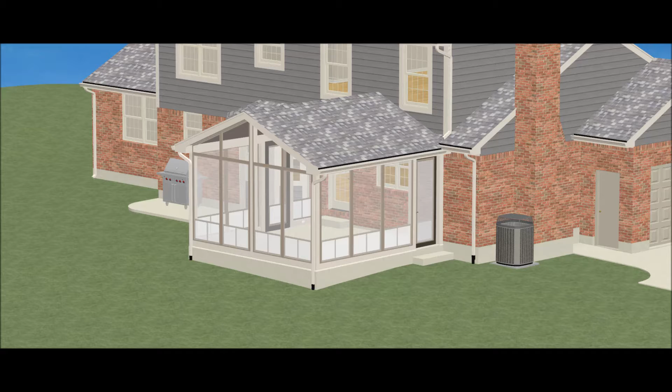Okay, this should be the last film to review this project. I know that these walls have changed, but this was what I was putting together earlier with regard to the foundation. The foundation needs to come out in front of this structure in order to provide clearance for the column bases at the bottom of these columns.

The three columns at the end supporting the three beams, those require CBSQ44, and that requires 3 inches of clearance from the edge of the base. And since the bases are 4 inches after the straps in one dimension, that really means that you need a 10-inch wall centered under that 4-inch base, or at least 10 inches of concrete, and that's got to go down at least 3 inches below the base, so 11 inches down.

Now the 4 columns back south against the brick, flanking the doors, etc., those will use a lighter base, a PBS 44Z, and that only requires 2 inches from the edge. But it doesn't really matter because I assume we want this symmetrical out there at the corner where it has the same projection in both directions.

As I said, I made this model earlier, and as shown, it only projects about an inch or so from the face of this because there was 2 inches under it. But in the final permutation, you'll see here in a minute, the surface of this foundation comes out 2 full inches in front of the surface of this structure to provide that 3-inch clearance for the column base.

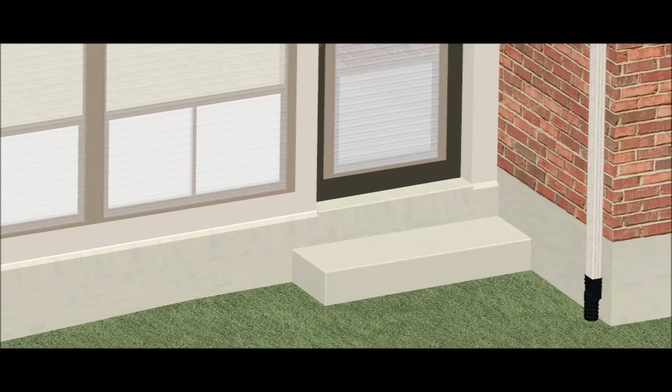So at all the margins you have this bevel, except at the doors there it has to come out. So this all has to be formed as it's poured or right after it's poured. This stuff has to be taken care of. I suppose these corners are clipped off on that sill. But this one here now you can see is the 2-inch projection. You can also see that line of aluminum flashing underneath the cedar and over the concrete.

The same sort of thing happens on this side as well. I didn't want to just run that same bevel in front of the doors. It would tend to be a slipping or tripping hazard. It just wouldn't be correct. And I think this is probably the best we're going to do with the interface at the bay window roof and this roof. As I said, I don't care for it, but I don't know a better solution that's not expensive.

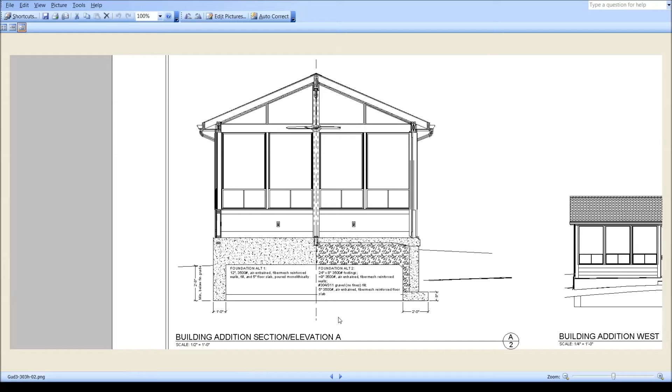And so currently, because of the site and the undecided nature of how exactly this foundation is going to be put together, I'm showing 2 different alternatives in the drawing plans. Foundation 1 is a monolithic pour where we just fill everything in there and come down with 1 foot wide walls. This would have to be formed above the grade. I don't know how that's done. I'm not a concrete person, but that would need to be formed above the grade, and then all this bevel work and edging work done, all while it's poured at once.

The other alternative, foundation alternative 2, is a 3-pour arrangement where I assume it's going to take a 2-foot footing for your person to form this up there. So the footings, and then 8-inch walls, but the front wall is going to have to be a 10-inch wall. At least that north wall has to be a 10-inch wall. These flanking ones can be 8-inch walls.

And then finally the 3rd pour is the cap over, and you have to have some sort of separation here, I assume. So this pushes this out. So this projects about 2 inches from the face of the structure, and this one projects about 3 inches because it has to have some sort of separation here. So that said, I wanted to see how much concrete either one of these was going to take. That might help a person make a decision about which way to go.

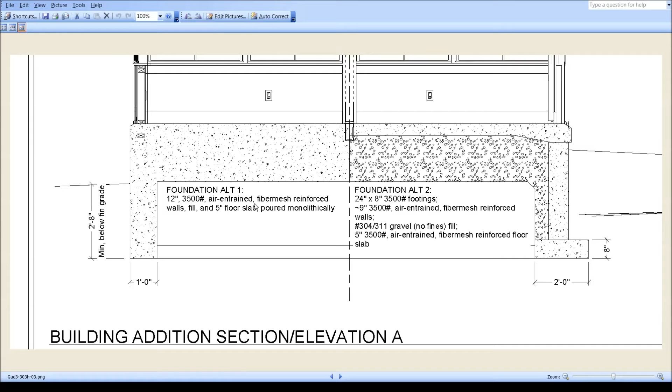And this is what I did to kind of figure that out. These are probably fairly reliable numbers. That's just that surrounding part there. And then you can see this is at the front end, at the north end. This is how the grade, at least according to the best I could do, this is where the grade is, where the screen is coming down.

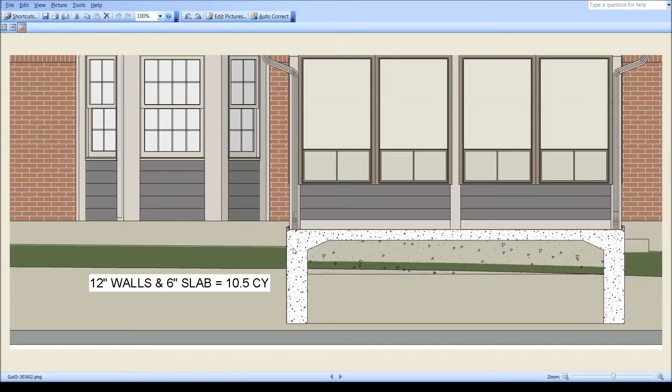So if a person was just going to fill this all in with concrete, and if they're going to scrape that off level, move all this stuff so everything is just level in there, if they were going to do that, all that is filled with concrete as well, and all of that is poured at once in alternative 1. The infill concrete alone is 14 yards. This part is 11 yards here, and this part is another 14.

So the monolithic pour, it looks to me like, particularly if all this earth is scraped off to about this level, we get down to 2 foot 8 below grade, the monolithic pour all at once would take 25 cubic yards, which seems like an awful lot of concrete. But that was my calculations on the monolithic pour.

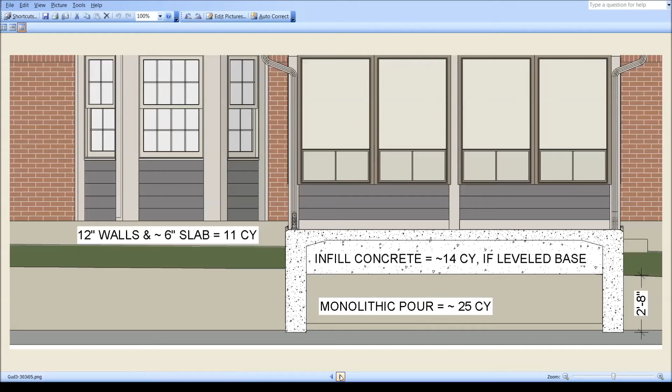On this here, it's 10 inch walls at the north end and 8 inch down the side, which is what it would be if you use this alternative. With the footings 2.5, the walls another 5, and the cap another 5. And so about half the concrete for this here, but you have to pump it 3 times instead of once. And then you'll need infill gravel, I assume about the same amount in yardage.

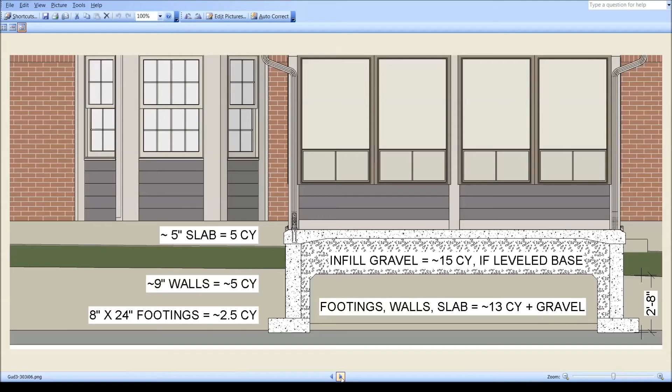So I just wanted to run that just so that you would have that information. I don't know that that helps. I think it comes down to what is going to be logistically sensible.

And so this is sort of this final structure, or the condition it is right now. It's 17 feet deep, and I've put these walls in, about 2 foot walls. Actually, I think they're 2 foot back here, and then they end up at about 2 foot 6 or 2 foot 2 out here because of the sloping of that slab. I suppose you wouldn't even have to slope that slab. You probably could make that level, but I'm not sure about that. I'm showing it sloped 1/8 inch per foot from the door out. I'm showing this sloped 3/16 per foot this way, down slope.

And I don't know how large your table is. Damon was telling me about a table you want to put out here. If you want to send me a photo of the size of that table, I can show you how it fits on this, or if we're going to expand that, I can model that for you, and you can make a decision on what the shape of this is, or how big it is, or if this is enough.

One other adjustment I made when I put this heavier member back in here. For one thing, I think that can just be a box beam made of plywood and 2x4s. But originally I was showing 2x2 bars between the screen cells, between these units, and up between the traps. Those were 2 inch by 2 inch bars. If you wanted to just use solid cedar, it has to be at least net 2 inches wide.

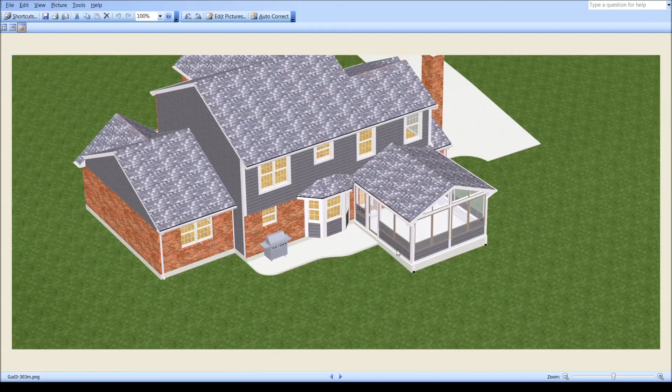But I called down there, and you could get a piece of 4x6, split that in half, and then use like 2 inch wide by 2 5/8 deep solid wood members between those. So you could barely see some of that light colored wood inside instead of the metal that I had been showing. That's completely up to you how you treat that, but it can be just wood. And so I just wanted to cover that.

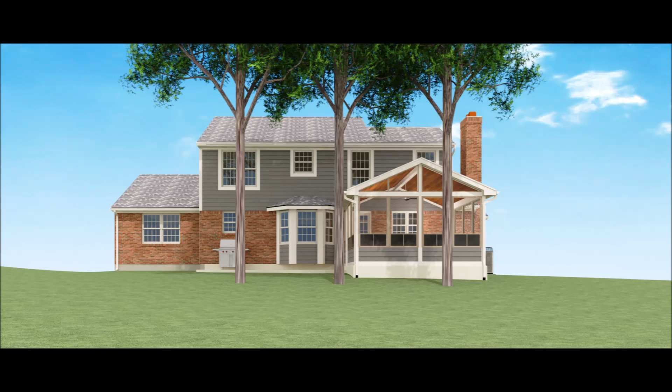And these are just the outside photographs of that finished 17-foot deep structure. And I think that does it. I just have to add labels to the section, and these are ready to apply for a permit. So let me know if there are any further changes. Thanks.